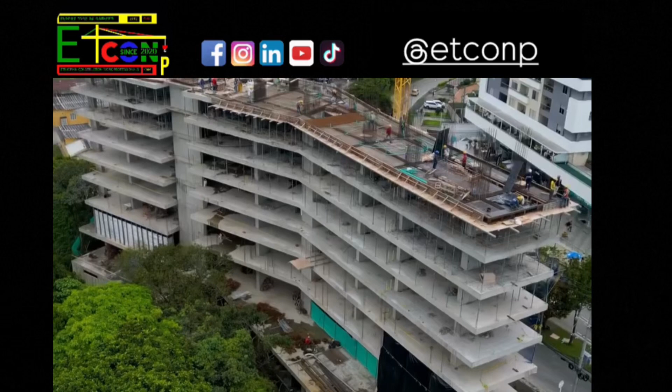Top 12 software used in the construction industry for architects, civil engineers, and project managers.

Number 12, Procore. Procore is a cloud-based construction management platform that connects every project stakeholder. It's best for general contractors, owners, developers, and consultants. It is not commonly used in Ethiopia.

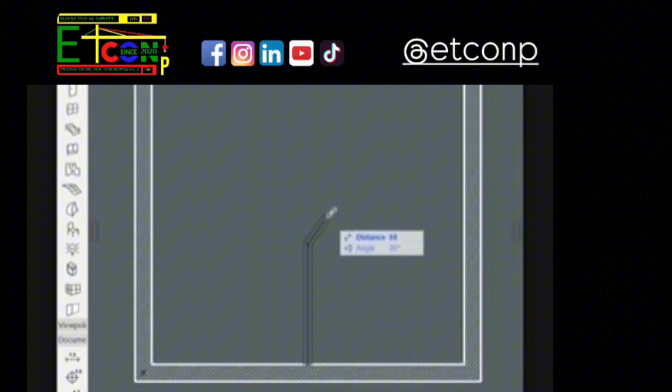Number 11, ArchiCAD. Developed by Graphisoft, ArchiCAD is a BIM and CAD software for 2D drafting, 3D modeling, and rendering. It is commonly used in Ethiopian universities, especially in architecture programs.

Number 10, SAP 2000. SAP 2000 is used for structural analysis and design, ideal for dams, bridges, buildings, and irregular shapes. Developed by CSI and used by civil engineers and mechanical engineers.

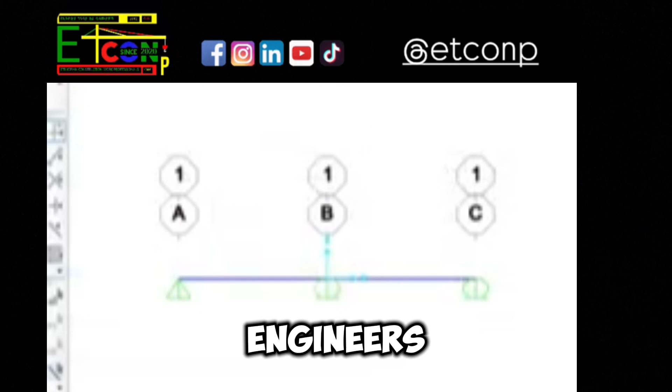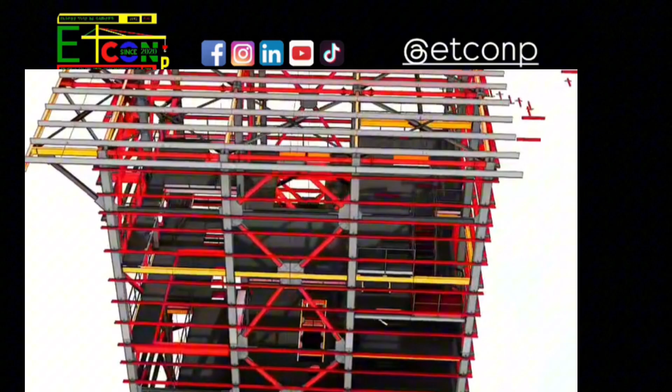Number 9, Tekla Structures, a powerful BIM and detailing software developed by Trimble, best known for steel structure modeling and fabrication. It is not common in Ethiopia.

Number 8, Microsoft Project. A project management tool for scheduling, timelines, and construction progress tracking, suitable for small to medium project scales, developed by Microsoft and commonly used in Ethiopia.

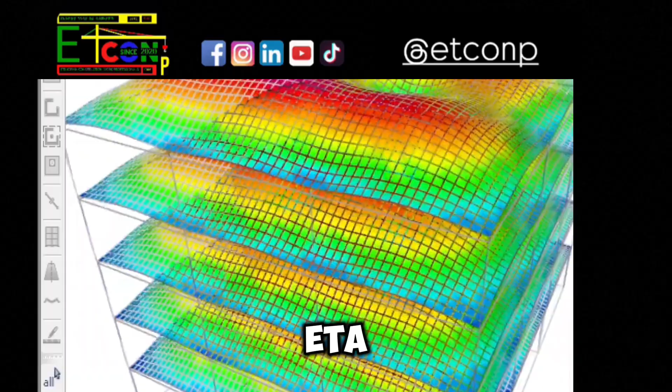Number 7, ETABS. Developed by CSI, ETABS is widely used for structural design and analysis, especially for buildings. It is very common in Ethiopia among structural engineers.

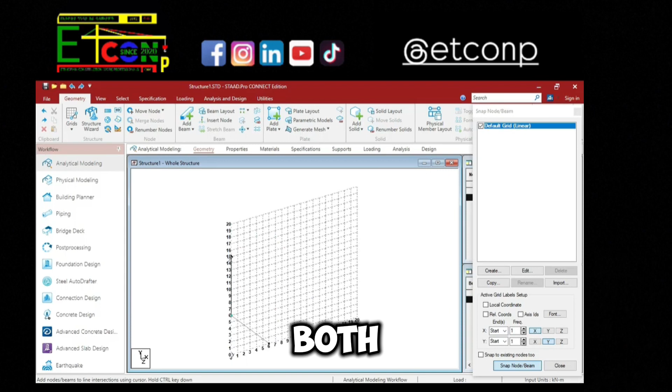Number 6, STAAD Pro. Structural analysis and design software developed by Bentley Systems, useful for both steel and concrete design, but not commonly used in Ethiopia.

Number 5, SketchUp. A versatile 3D modeling software developed by Trimble, popular for architectural visualization and concept design. It is common in Ethiopia, especially among architects.

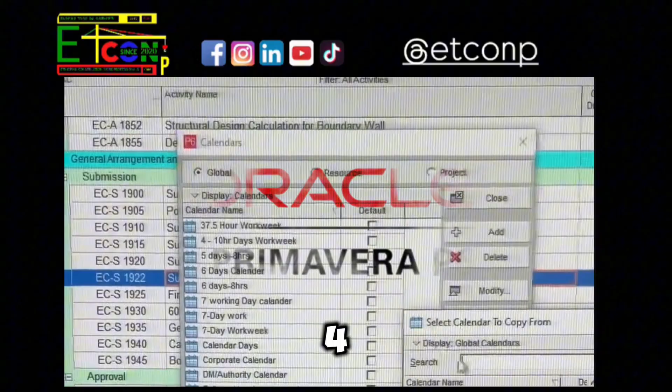Number 4, Primavera P6. Professional project management software developed by Oracle, used for medium to large-scale projects, especially by project managers and contractors. It is common in Ethiopia.

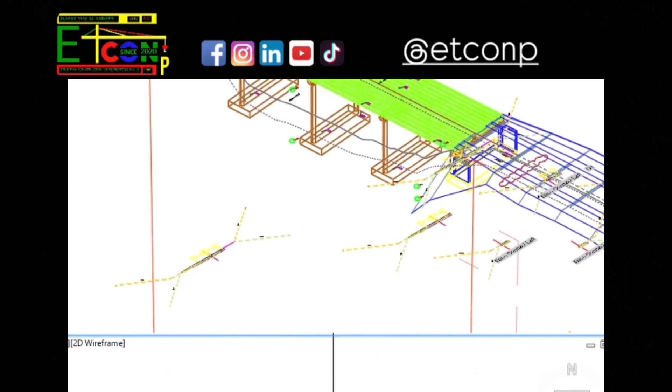Number 3, Civil 3D. A powerful design tool for civil engineers developed by Autodesk, used for road and highway alignment, survey data processing, and pipe network design. It is commonly used in Ethiopia.

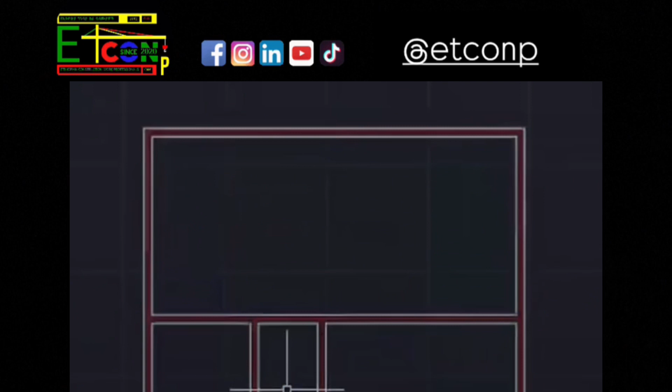Number 2, AutoCAD. A universal CAD software used across all engineering fields: architecture, structural engineering, mechanical, electrical, and plumbing. Developed by Autodesk and extremely common in Ethiopia.

Number 1, Revit. A leading BIM software used for architectural, structural, and MEP design, and even by contractors, developed by Autodesk and widely used in Ethiopia.